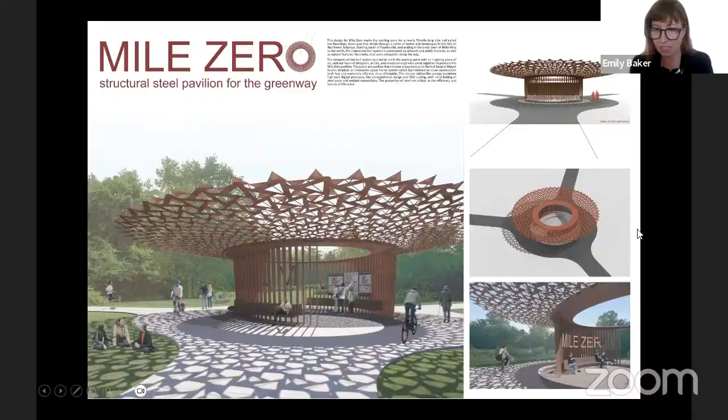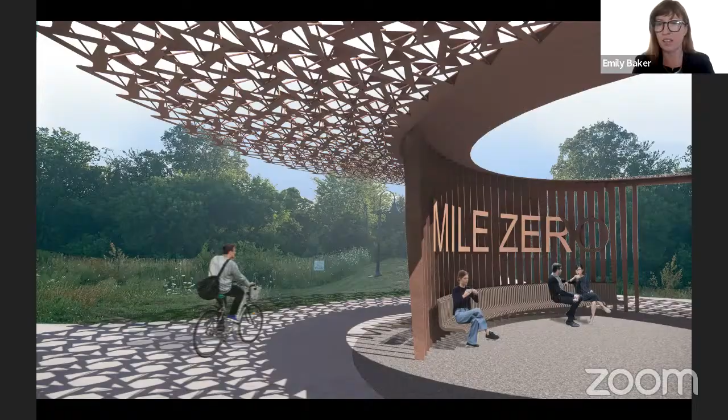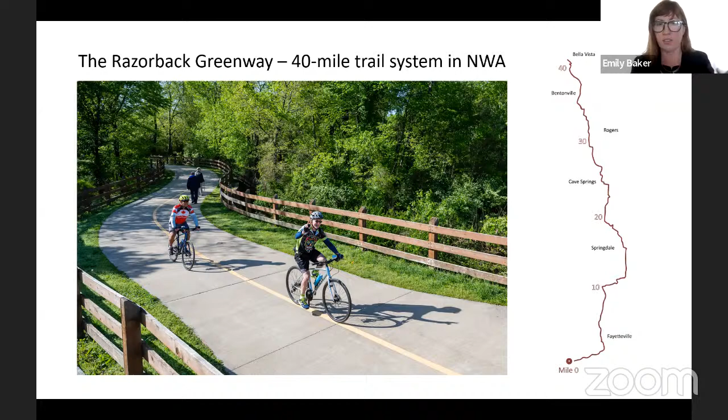The project is a kind of space frame canopy that is supposed to be a public amenity and marker for the Razorback Greenway, which is a 40+ mile multi-use trail system that has a lot of spurs. It's well loved and really well used and a wonderful resource for our area.

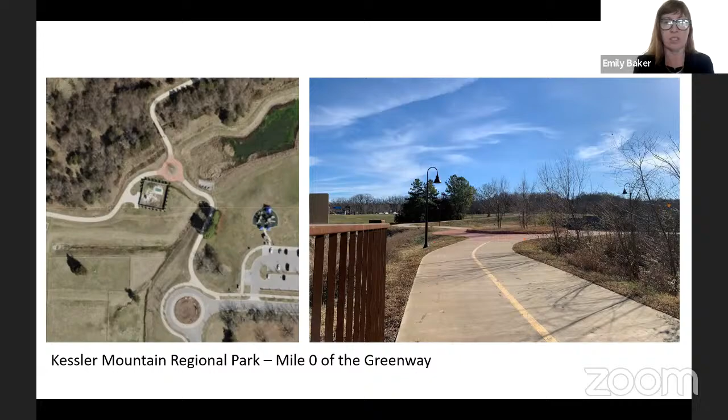The beginning of that trail, the 0 mile of that trail, is at this park, this recreational area called Kessler Mountain that includes a lot of mountain bike trails. It has this little nondescript roundabout that you see in the picture to the right that is the beginning, the Mile Zero of this long trail experience. The only thing marking it right now is this kind of small bollard that lets people know that they're starting at the 0 mile.

So we wanted to, at the request of some regional and city entities that were interested in celebrating this moment of the beginning of the trail system, propose this piece, which is kind of a public art meets pavilion piece that includes weathering steel as the main material and a canopy that's made out of a spin valence system.

I will describe it momentarily. That allows for this play of light and shadow and pattern to happen on the ground below it. So you're kind of moving in this circular pattern around this central point. It provides a place for people to meet up, for people to get information, maps, sit, meet each other, and maybe even take photos after a 40-mile ride.

So spin valence is a system that I developed when I was in grad school that is a Kirigami-based space frame system. Kirigami, like origami, except including cutting, so cutting and folding of sheet materials.

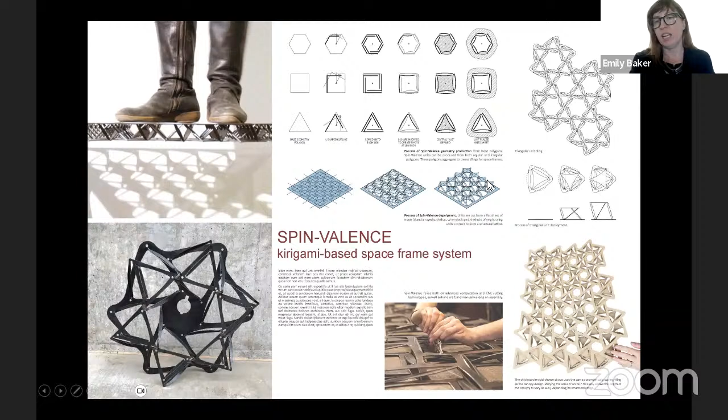The system works by creating a pattern of units that is cut into the surface of a sheet material, or sheet steel. It then folds—each unit folds up and out of the sheet and reconnects to its neighboring units to create structural depth. In this photo, there's a 12 gauge sheet of steel about an eighth of an inch thick, and it effectively gets turned into something that's 2 inches thick with quite rigid structural spanning capability.

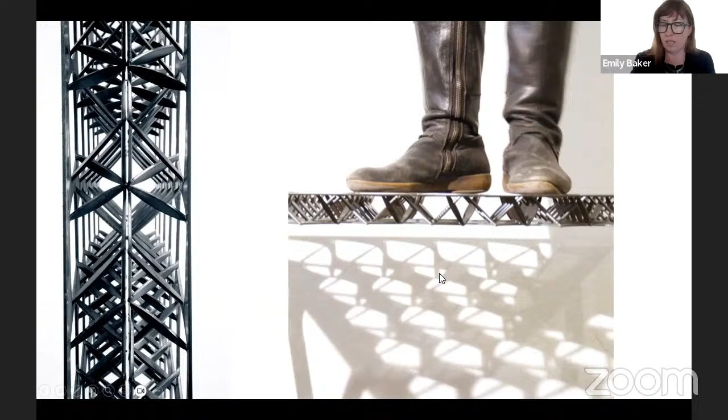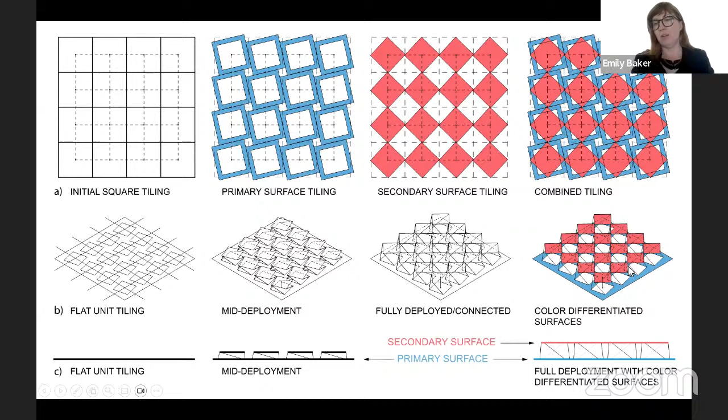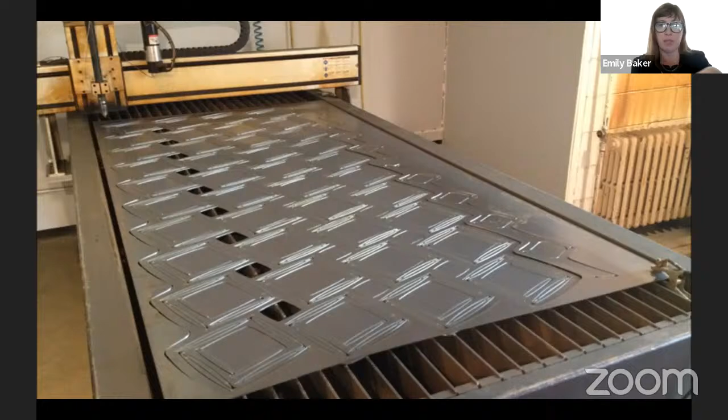You can also see below the way that it transforms light as it moves through. So from one sheet of material, you end up with two layers interconnected with triangulating legs—very similar to a traditional space frame, but the way it works can be a lot more rapid. Here's a plasma cutter with a sheet that's been cut, and that would end up being unfolded into pieces like these.

I've made some larger scale prototypes like this, and been able to observe the way that they deal with light and shadow as it moves throughout the day.

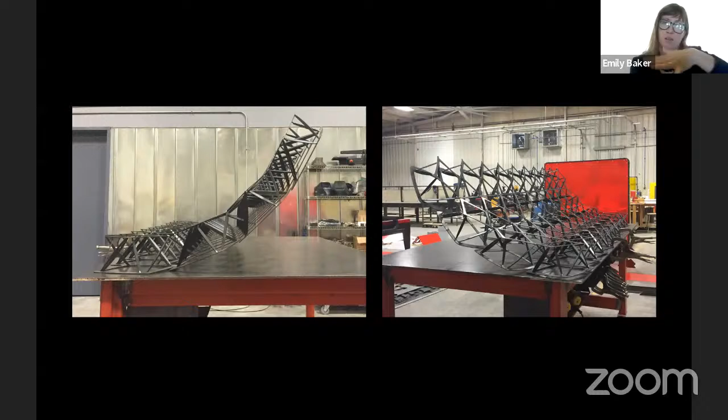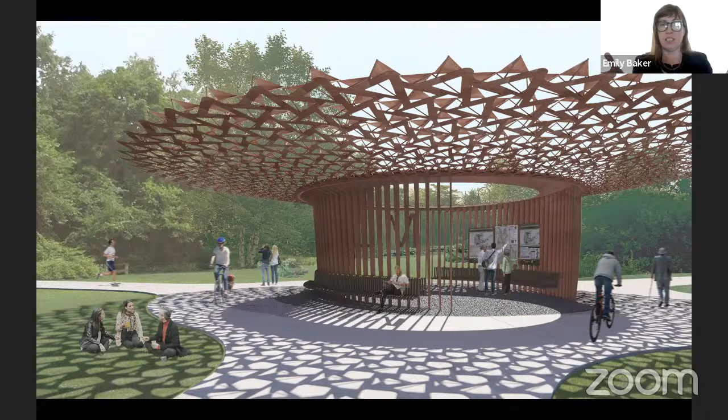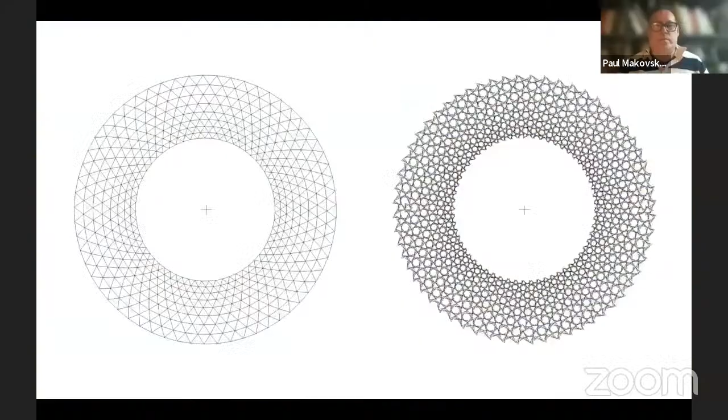I've also done some experimentation with getting the system to curve. But this proposal would be by far the largest and biggest public application of spin valence, with a slight cone shape to it, so it moves away from the flat application a little bit. It's a horizontal application, whereas most things I've tested have been generally vertical, though it has that capacity to span. It also scales from smaller units in the center to larger units on the outside.

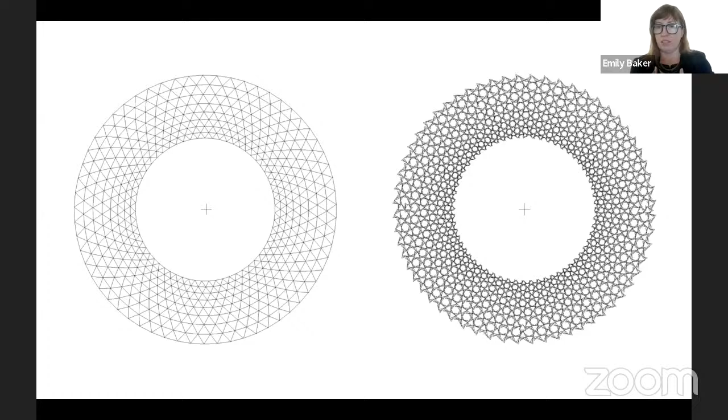On the left, you see the base tiling pattern that we started from, and on the right, you see the way that spin valence system is deployed—that's an aerial view, and this is a representation of it from the air. Because of the scale shift of smaller triangular units on the inner ring and larger ones on the outside, we get a shift in depth as it comes out away from the center.

The ring of space frame comes in and bears on this built-up beam that becomes like a compression ring. That ring bears on these plate-like columns that ring around the central space, which also have an interesting visual effect—sometimes transparent, sometimes a bit opaque.

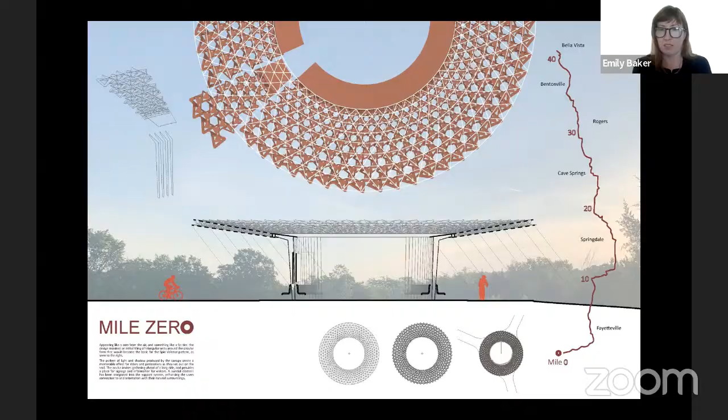Through talking with Tony Diebold, I was able to visit their shop in St. Louis, and we decided to divide up the canopy into 20 slices like this. The end of each slice is just around 8 feet, so it would fit on a large scale plasma cutter and be able to cut out of a single sheet, then be deployed into its structural form, shipped to the site like this, and assembled on site.

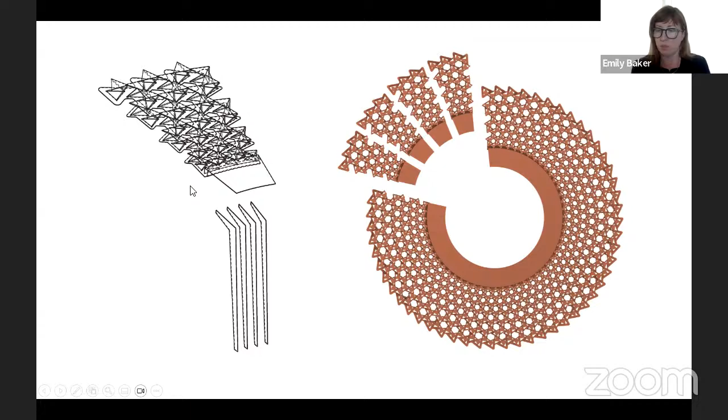Great, thank you, Emily. Now we will show the preliminary structural evaluation of the system, going from a study of individual units to how the whole system is intended to behave.

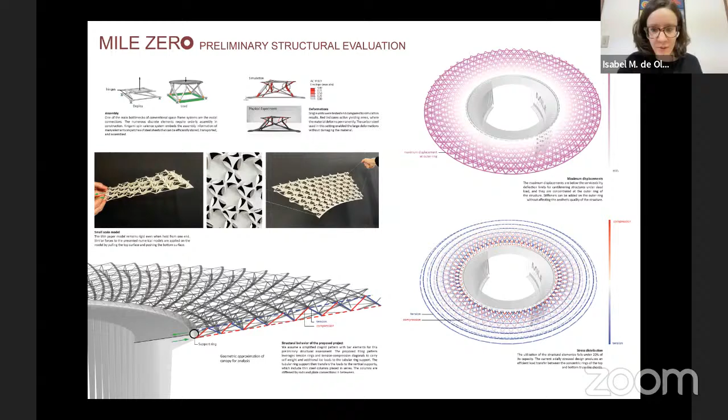First, to connect to the fabrication aspect we were just mentioning, you can see here at the top left the fabrication of a section of the canopy with a paper model. When we first test holding it only from one end, we can see it already shows higher stiffness compared to a flat sheet—here is also a model of this and how a flat sheet would be. Then you can see on the bottom left, three of these sections connected, as we were mentioning, connecting up these sections to make the whole surface.

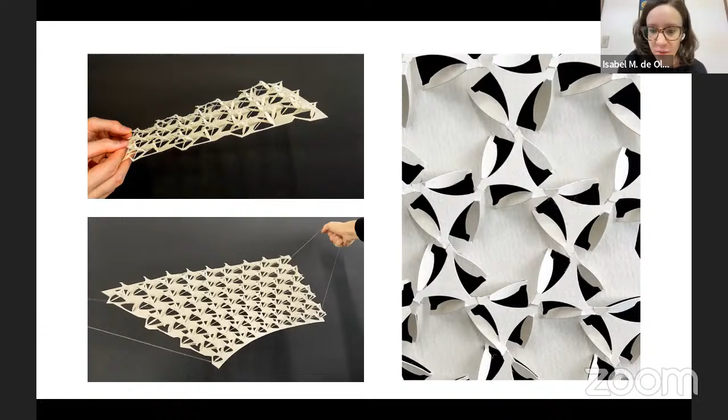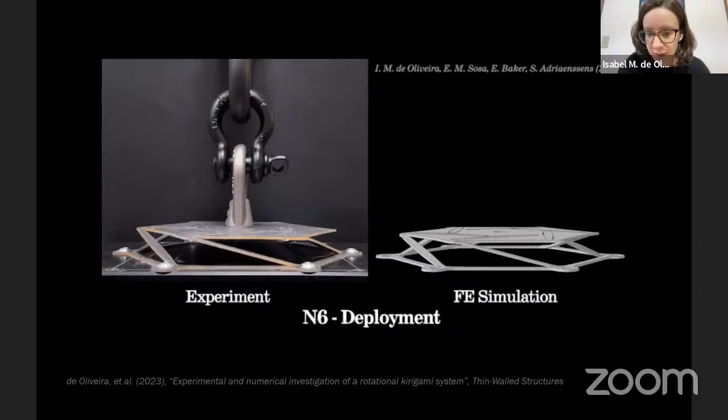But let's take a step back and zoom into the behavior of the individual units as shown on the right. In a recent scientific publication, we show that we can reliably fabricate the system using steel, and that the forces needed to deploy the system remain very low, around 30 to 80 pounds—something we can still do with our own hands.

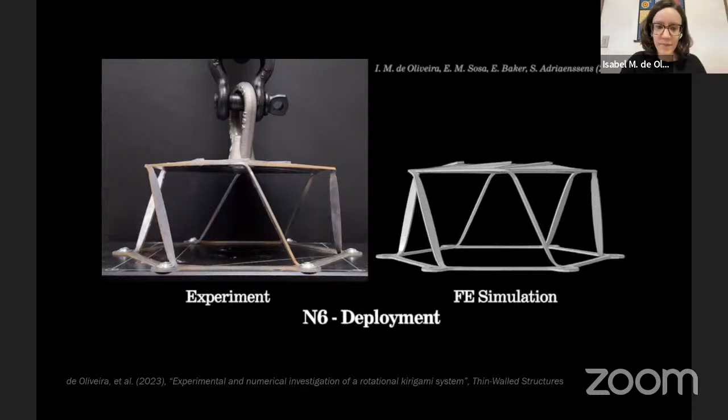Also in the publication, we tested the system under compression and found it can take up to 1,000 pounds, or about 1,400 times its own weight, and that is only for a unit about this size, which I'm showing you here. I'm sure we can develop the system further and get even better results than that.

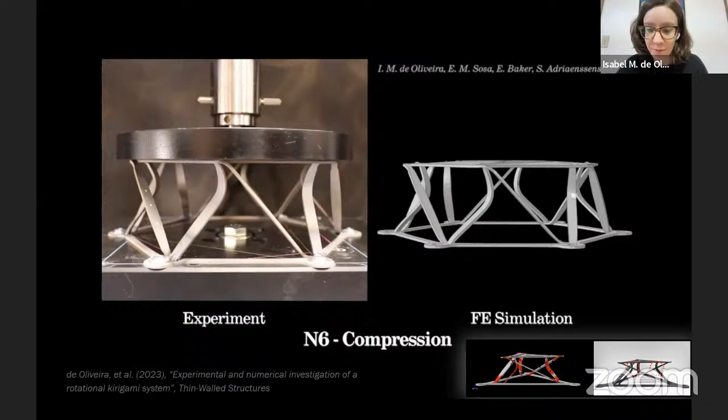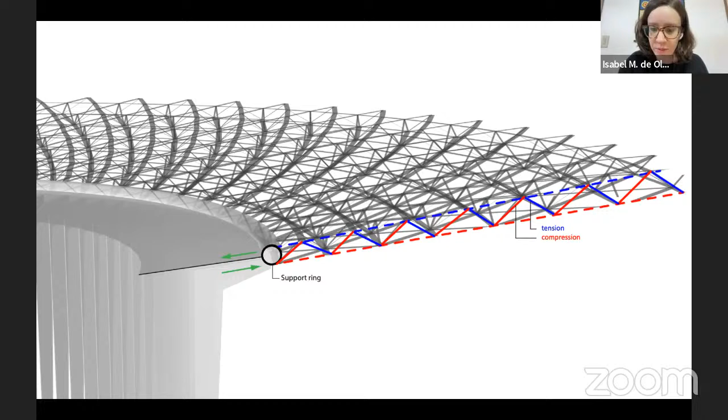So here we show the section zooming out, looking at the section of the canopy. We see that the system can behave almost like the space frame we already know, with mostly axial force flow. And the system can then transfer the forces down to the support ring, which in turn transfers loads to the series of columns that we have on the design.

Zooming out even more, we see the system is not only distributing forces down to the support structure through truss action, but when it is fully connected to the final form, it also self-stabilizes with the tension rings that you can see in blue.

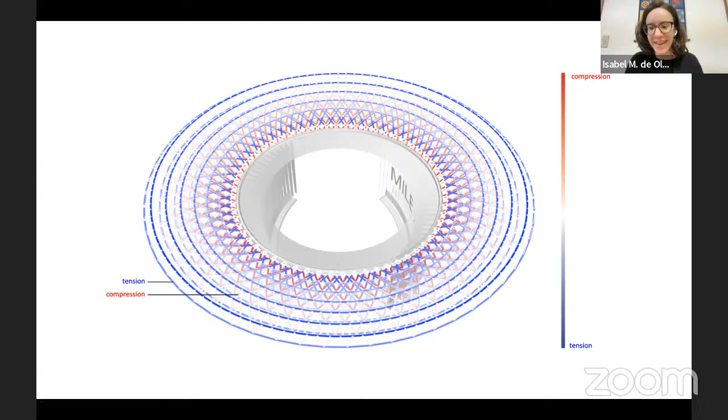Of course, this is only a preliminary study, and if this concept is successful, we would love to dive deeper and have a more detailed perspective of the structural solution. But for now, we leave you with this concept in mind, and thank you.

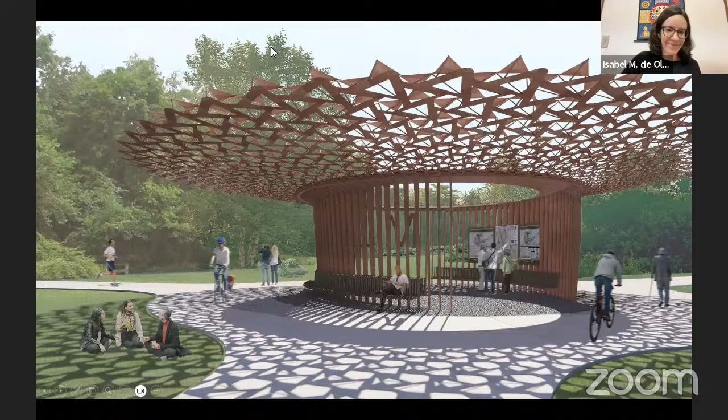How does the sunshade connect to the compression ring in the center? Is it just a bolted connection or a welded connection, or? Well, when we discussed it with Tony, we talked about site welding, but I think those are things that we would probably have to iterate with our fabricator and make sure they work well. Yeah. Okay, that was my question.

I have a question. How wide is the inner ring? The outer diameter is 60 feet. The inner ring, I don't have the exact dimension off the top of my head. It's 22 or something like that.

Okay. I guess, having this pavilion which is going to provide shading, and hopefully if it's raining, how much of the pavilion is, let's say, practical? It's not meant for really rain cover the way it's designed right now. It doesn't have a surface on top of it. Right. Yeah, it's meant to be kind of an outdoor sculptural piece.

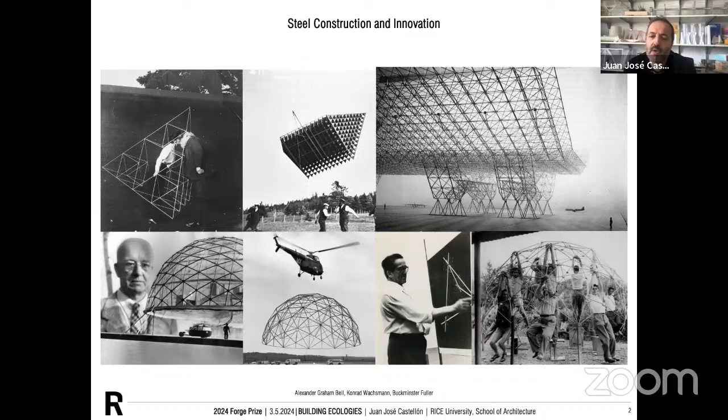Traditionally or historically, steel construction has always been at the forefront of building innovation. If we take references like Buckminster Fuller, Konrad Wachsmann, or Alexander Graham Bell, they all imagined and materialized beautiful and innovative structures. But what made these projects extremely impactful in their context was that they were also proposing ecological and sustainable building models for our planet.

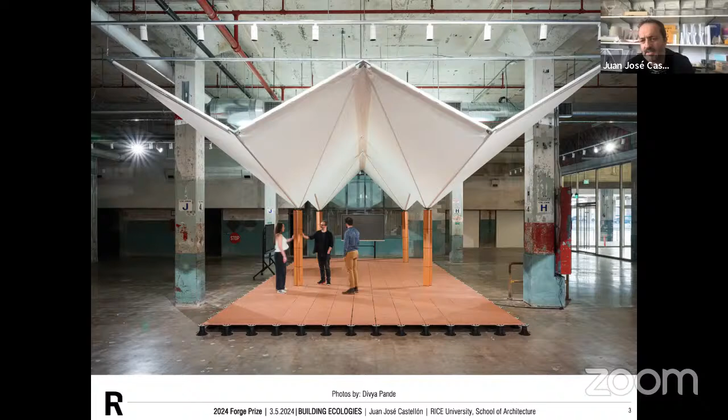So inspired by this tradition, Building Ecologies is conceived as a modular and collective building infrastructure that provides shading and shelter while collecting, cleaning, and harvesting rainwater for irrigation purposes, as well as heating and cooling strategies for urban rooftops and public spaces. Questions of lightness, prefabrication, modularity, transport, assembly and reuse converge in this proposed kit of parts.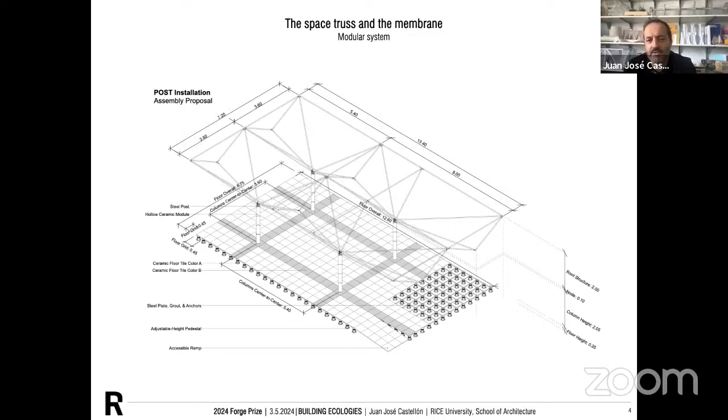And there is an additional layer that is more cultural. It bridges my own culture—I'm from Spain, from Barcelona. We have a strong tradition in metal, especially textiles, metal, and also ceramics. This project was developed also in collaboration with manufacturing companies in Spain and in Houston, Texas.

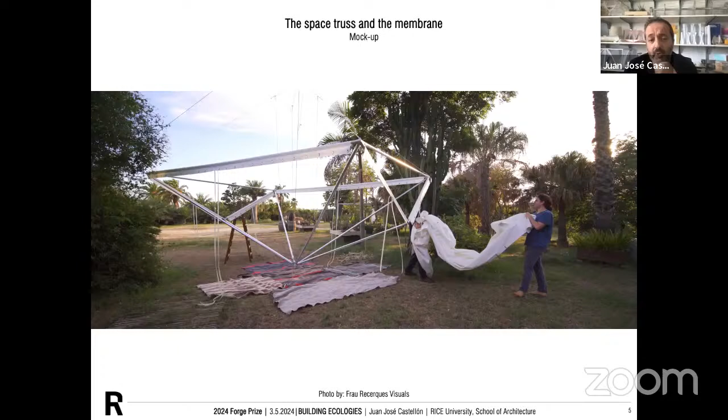So the canopy, in this kit of parts—the canopy, which is the most complex structure—was conceived as a space truss, and it was developed. Here you can see one of the mock-ups that was developed in Barcelona, in my hometown. And then the faceted waterproof membrane that collects and cleans the water was also developed there.

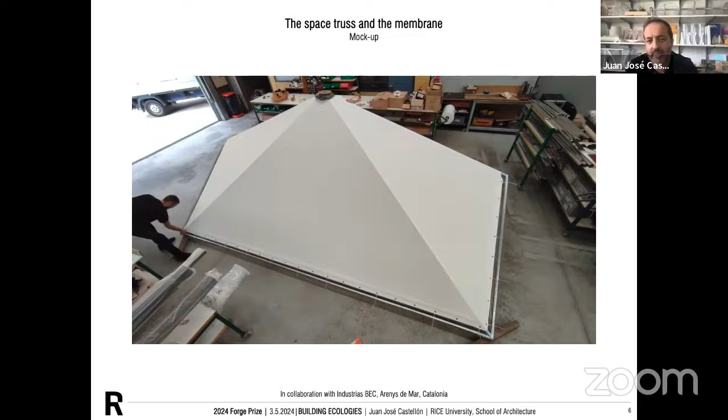This also connects with an ongoing technology, an ongoing project and research developed by our Civil and Environmental Engineering department at Rice and led by Dr. Qilin Li, that basically cleans all the impurities of rainwater—those raindrops that come from the atmosphere—allowing the water, when streaming through the expansive membrane, to be collected with already a level of treatment.

And then once collected, the rainwater is channeled through a component-based ceramic column that was also developed in collaboration with ceramic manufacturers in Barcelona, and connects also with the tradition of vernacular architecture that, in former times, these pipes were not PVC or plastic, but actually ceramic, and we wanted to bring back this kind of quality in the building components. So these elements, these ceramic pieces, work both as a structural element and as a water pipe.

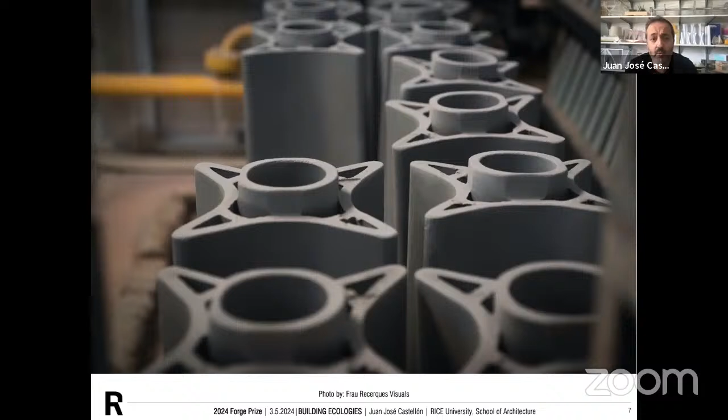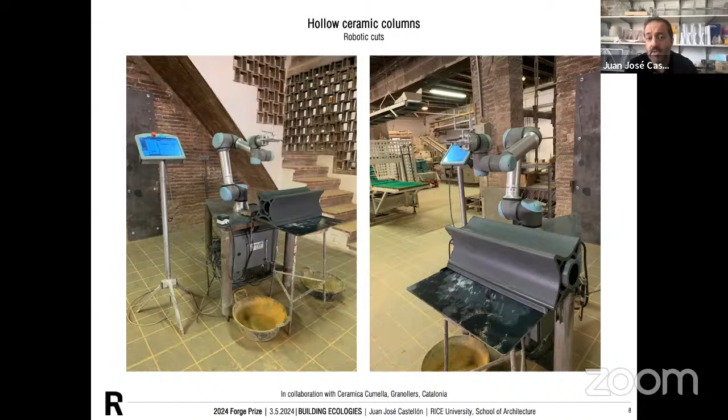And these ceramic pipes were developed again with traditional techniques, but also in combination with more digital technologies like robotic fabrication to generate these kinds of connections. So the resulting prototype was built and exhibited as an installation at Post Houston, and it was open to the public from October 2022 to April 2023.

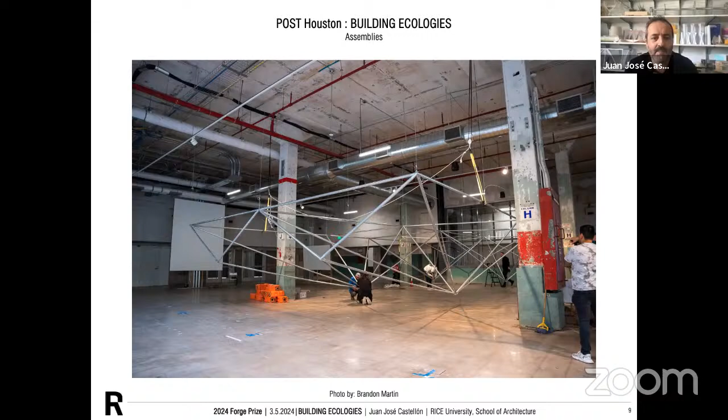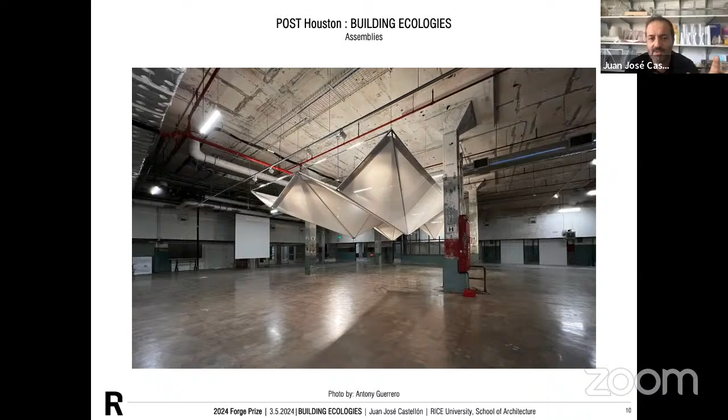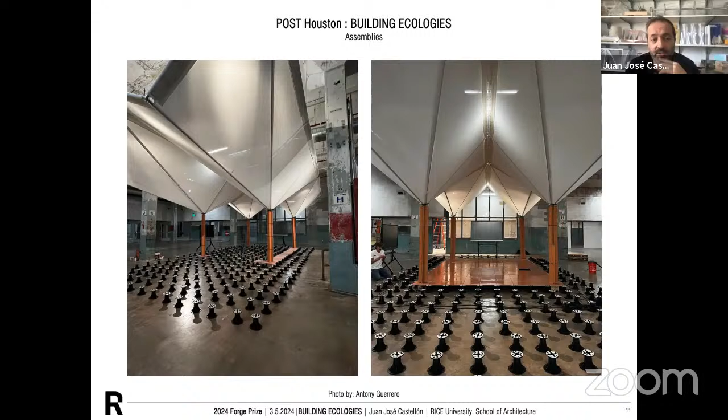So here you can see some images of the installation, which was also a very interesting experience because I brought some colleagues from Barcelona and some crew from Texas, and they were working together in the construction of the prototype, which was a really exciting moment. The resulting prototype came together as a nice combination of a pre-existing condition and a new nature emerging out of this material and structural logic.

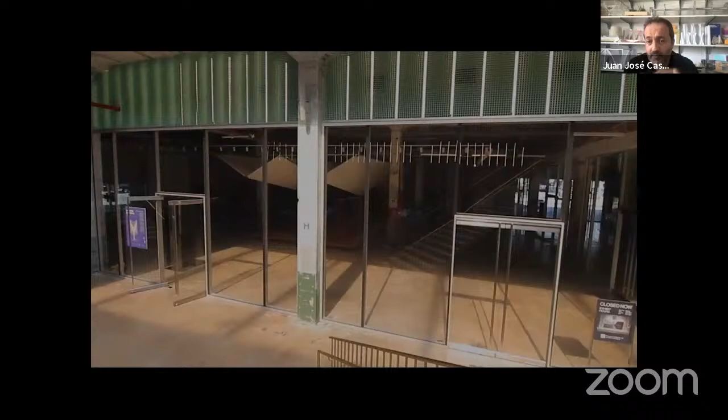Since the project, I'm now showing a small video that shows a bit of the final result, and you'll hear a small sound in the background. Since the prototype was built indoors as an exterior installation, I was collaborating with the composer and professor at the Shepherd School of Music at Rice, Kurt Stallman, to generate a soundscape that simulates and evokes the sound of raindrops and water streaming.

But of course, what we would like is to have this in an exterior experience. I think there is a part that is experiential, so actually bringing another layer of sophistication in the structure that is not only functional but aesthetically pleasant. And also in terms of perception, something I really enjoyed was how people were interacting with the piece, basically touching the materials and experiencing this kind of atmosphere.

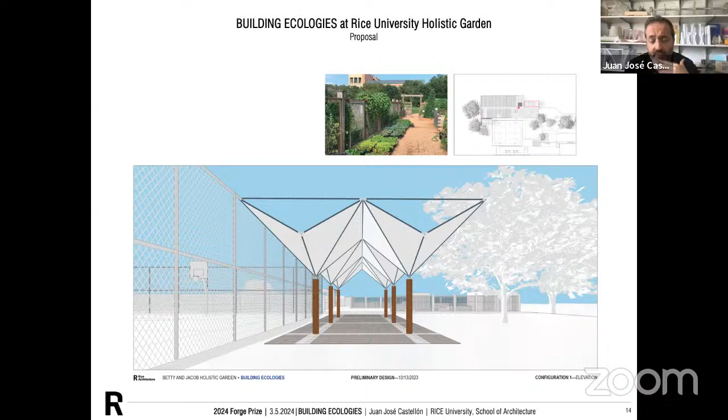So boosted by this generous award, we are now adapting the concept to an outdoor full implementation, which was the whole purpose of the project. The proposed site is at Rice University, the Holistic Garden, which is an urban farming and teaching outdoor space on campus that now demands more opportunities to collect and clean water for irrigation purposes, but also spaces for outdoor teaching and collective events.

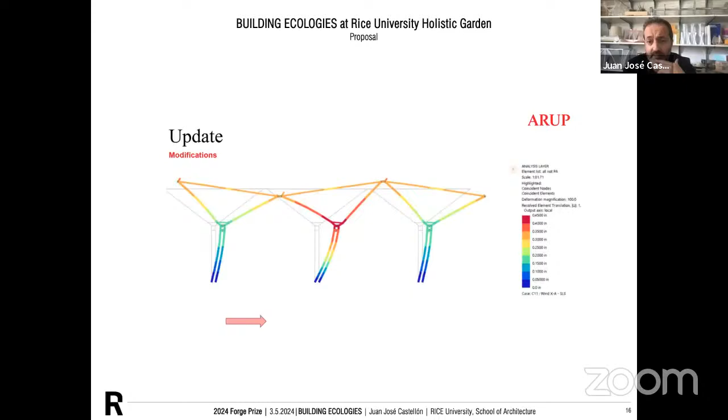So together with Thompson Metal Fab, with Thomas, but also with Arup Engineering, we have analyzed, simplified, and refined this modular system to respond to, for example, wind loads and other functional requirements. We have run a set of several simulations, double checking the feasibility of the project.

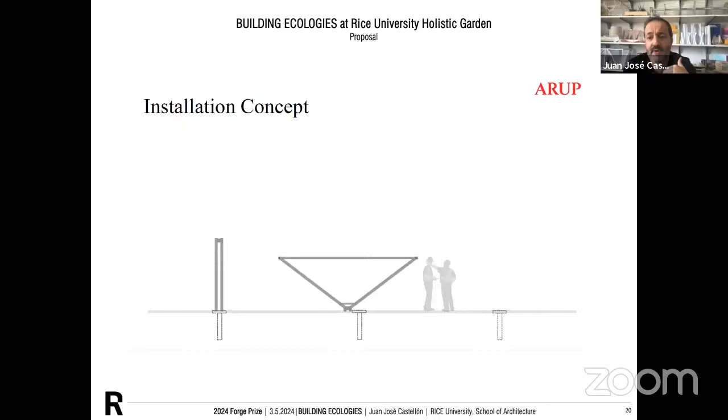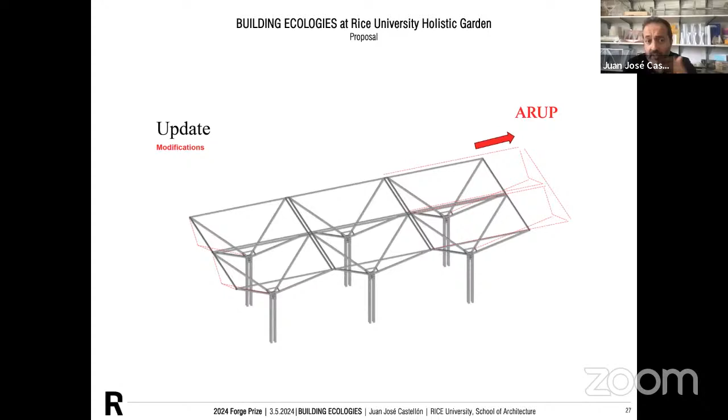And also the goal would be to achieve a system that is economic and easy to manufacture, transport, and assemble, and also adapt to different contexts and conditions. So there's a part of the project that involves the possibility to adapt this modular system into more expressive forms. And we are using technology for precise design and manufacturing of all the building components.

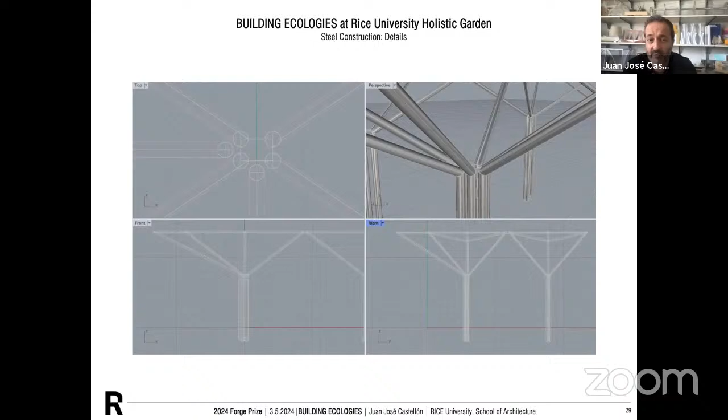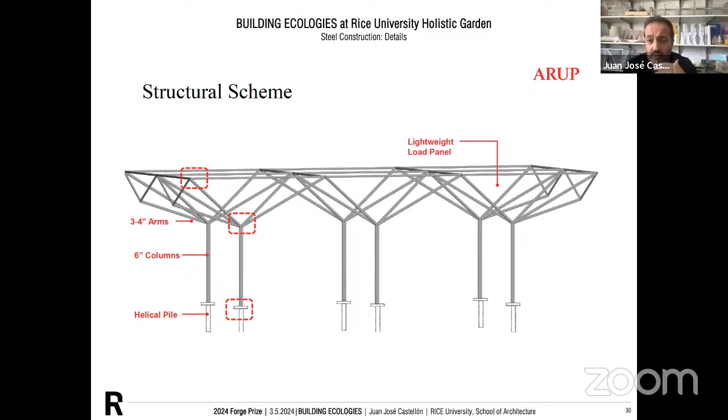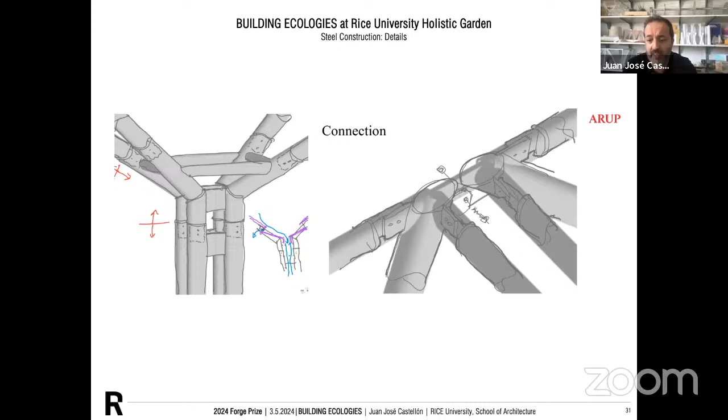Together with Thomas and John, we have been going through the project, trying to simplify it but also make it more feasible in terms of the connections, keeping the elegance of the proposal but making it economic and easy to assemble. So, for example, with Thomas and John, we were finding the right way to generate these connections in a plate-to-plate way, easy to manufacture and assemble.

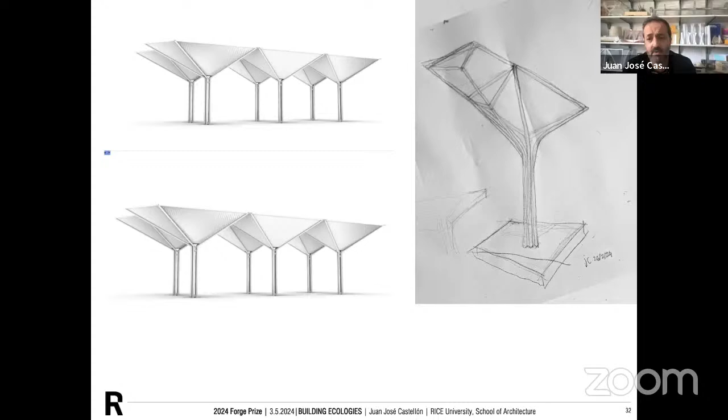But we want the steel structure to be the main protagonist while preserving the aesthetic qualities and philosophy of the original concept. So the result is an architecture that dialogues with the natural context and with our community, and explores contemporary and holistic notions of building and sustainable urban infrastructures.

So together with my brilliant team and excellent collaborators, we look forward to materializing the project that strives to achieve a balance between economy and beauty, ecology and innovation.

Thank you. And here a list of the team, with Elliot, my research assistant, who helped me with the images and the development of the project, with John Hand, Arup Houston, and Stephen Donnelly, and also, of course, Thomas and Eric from Thompson Metal Fab who collaborated on this project, which I really enjoyed.

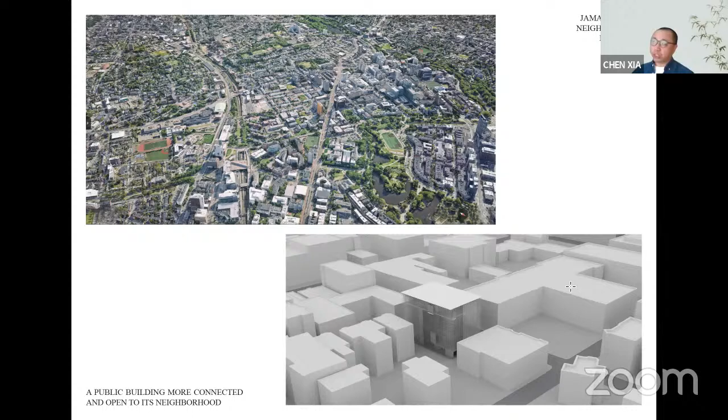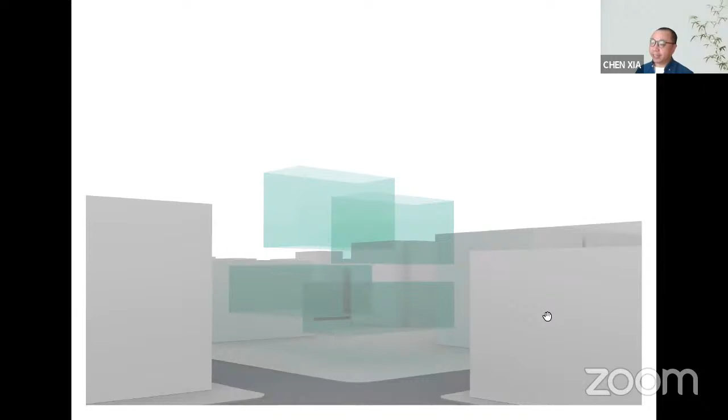This project is a public building proposal located in Jamaica Plain in Boston, Massachusetts. The client is a local artist organization looking for a public building design for local art activities. They want a building that feels more connected and open to its neighborhood. This is a concept physical model, and my basic design idea is to elevate some glass boxes in the air by a supporting structure with a sense of lightness and translucency. This is a concept image showing my design idea of the relationship between interior spaces and exterior skin.

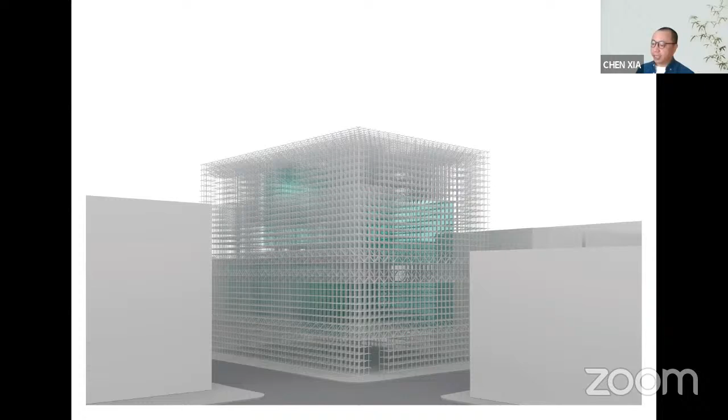To realize this idea, I think steel is the best choice of construction material. A regular cubic steel grid system can not only be the structure holding the spaces in the air, but also create the sense of lightness and translucency itself at building and urban scale. During the last couple of weeks, with advice and help from my supervisor John, I have revised the steel grid system. The whole structure consists of multiple modular steel cubes, with each cube measuring 2 feet in all 3 directions.

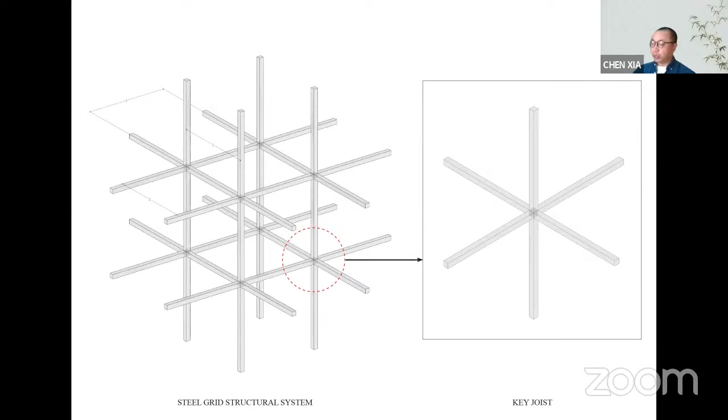The key structure of this system is the crossing joist, where steel tubes in all 3 directions meet. This is the key modular steel joist I created with John's advice and help. In the center there's a steel core, with 4 identical horizontal steel tubes and 2 identical vertical steel tubes. Now I will show the assembling process of this key steel joist.

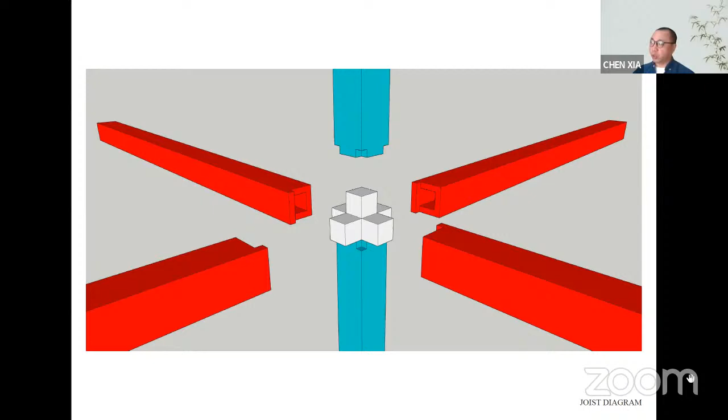Based on the concept and the steel structure design mentioned above, this is the final design of the Community Art Center, a translucent building that opens to its neighborhood.

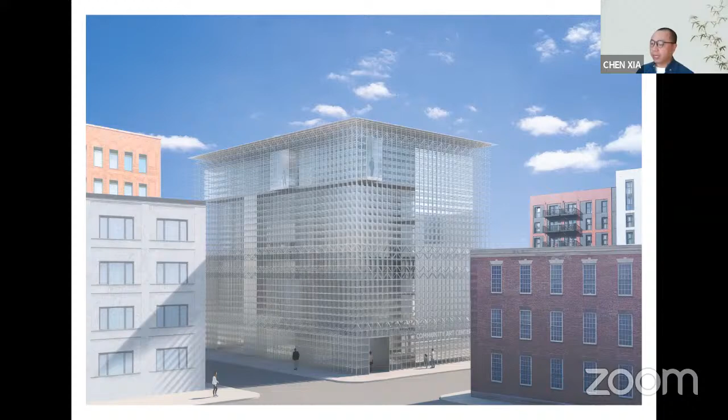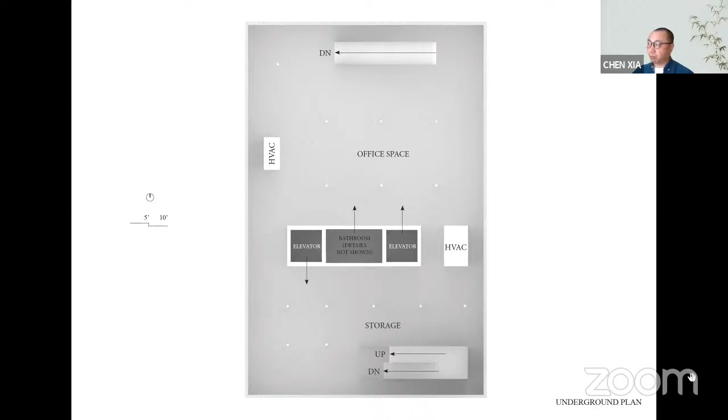This is the underground floor plan, with office and storage spaces on this floor. The ground floor is for public open space, with two staircases by the sides and an elevator core in the center.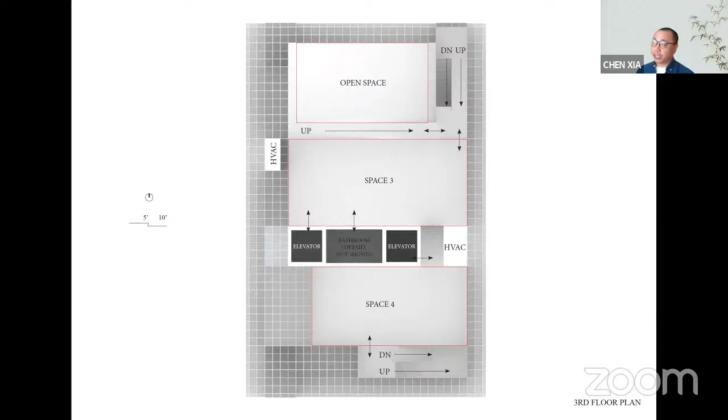On the second floor, there are two glass boxes as interior spaces. Similarly, on the third floor, two glass boxes serve as interior spaces along with an open space. On the top floor, the top terrace along the west side is an enclosed space connected with the space below.

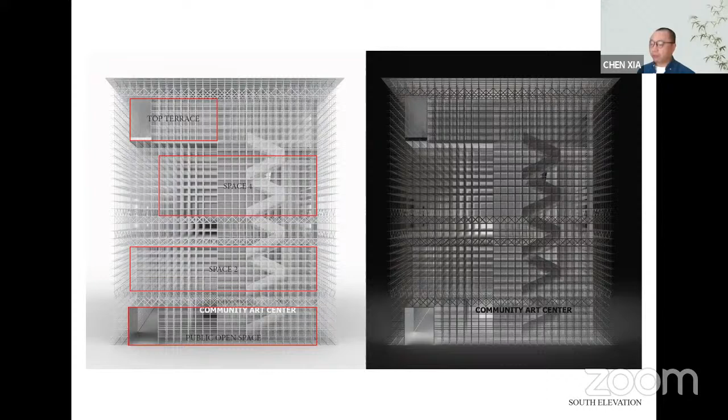This is the south elevation in day and night views. From the south facade, people outside can sense the interior space.

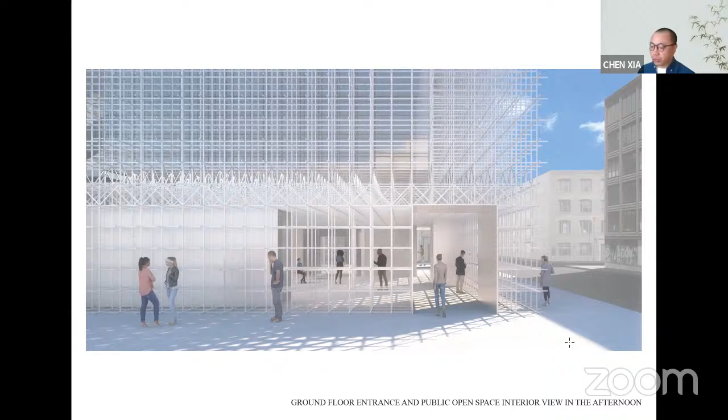For the rest of the space on the ground floor, the steel grid system doesn't enclose the space, it defines the space, so people can walk through, stop by, and get together on the ground floor. This space is part of the building and also part of the public open space of the neighborhood.

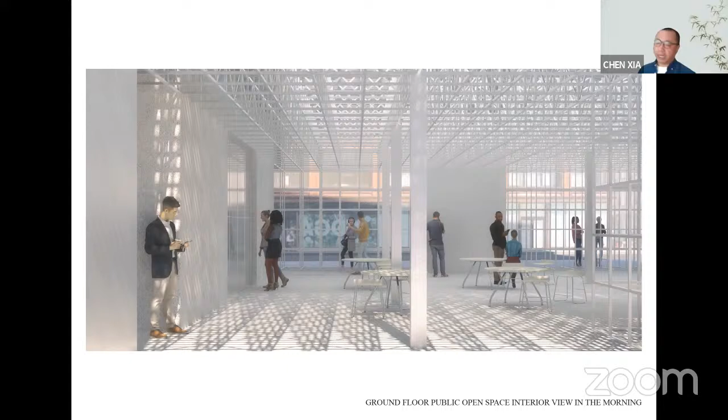Since the center core blocks the sunlight, space 1 and space 3 are covered with shade for most of the daytime.

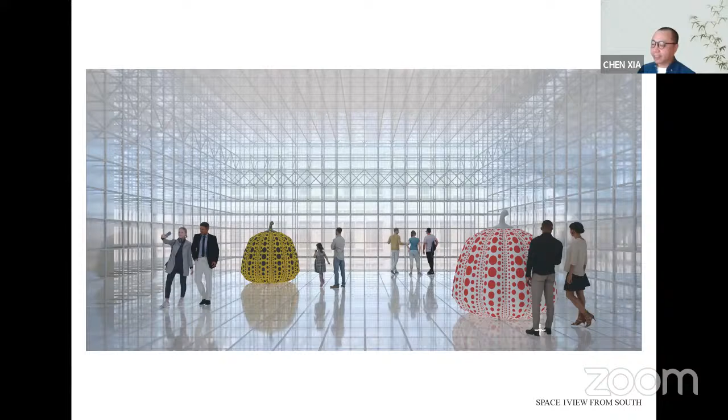This is a perspective view in space 1. People inside can sense the surroundings outside. Another view in the same space from the opposite side. For sure, there will be direct sunlight at some point in the day.

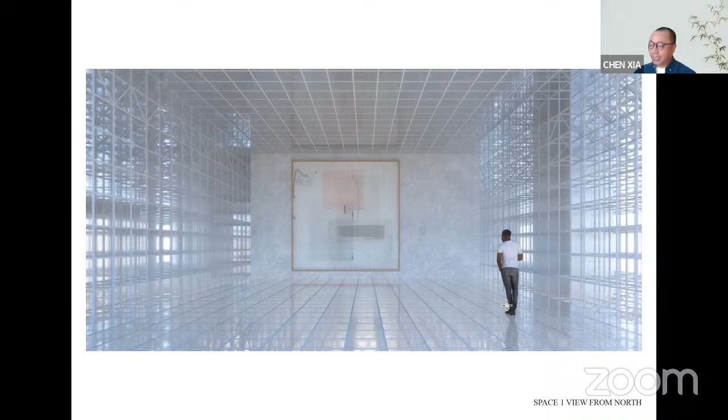Now I will show the sunlight and shadow variation in the space from morning to afternoon: 6:30 a.m., 8:50 a.m., noontime, 3:10 p.m., and 5 p.m.

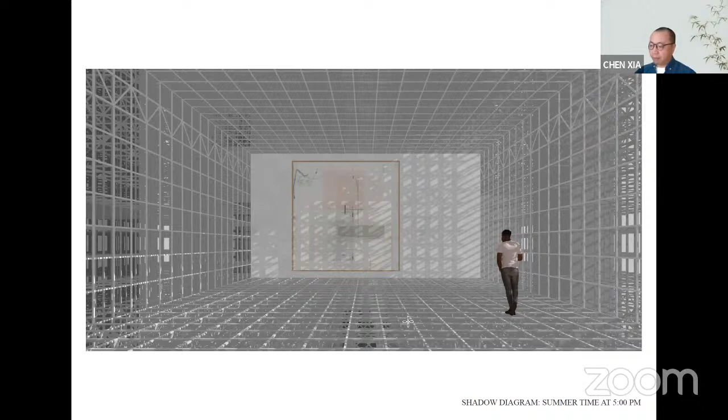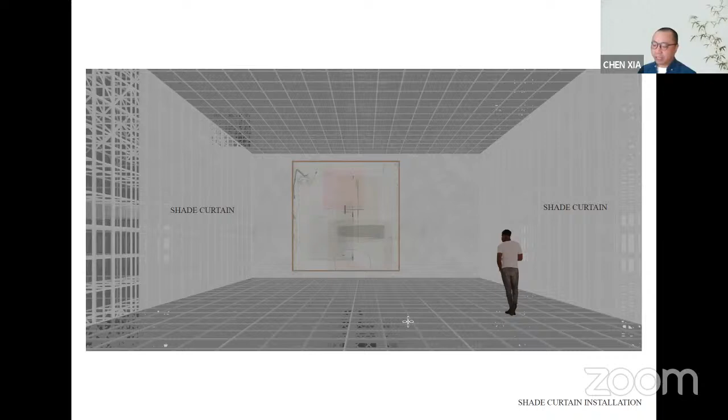The direct sunlight in space 1 and 3 only happens in early morning and late afternoon. If the art material is very sensitive to sunlight, or if there is some need for an all-time shade environment, my solution is to install shade curtains to block the direct sunlight.

Space 2 and 4 always get sunlight all day long. Sometimes maybe it's a good thing, because the shadows of the steel grid system may create a more artistic environment in the space.

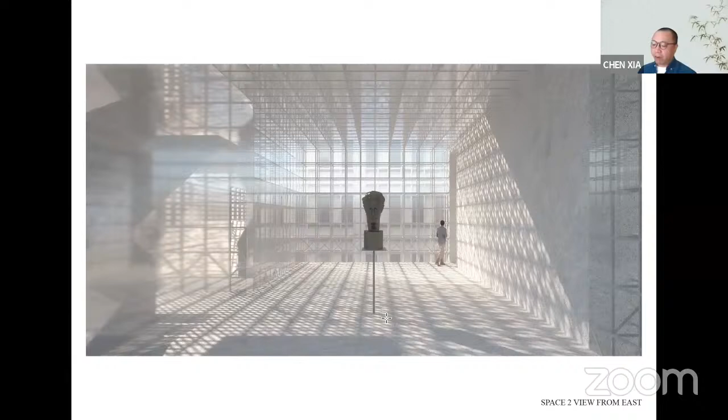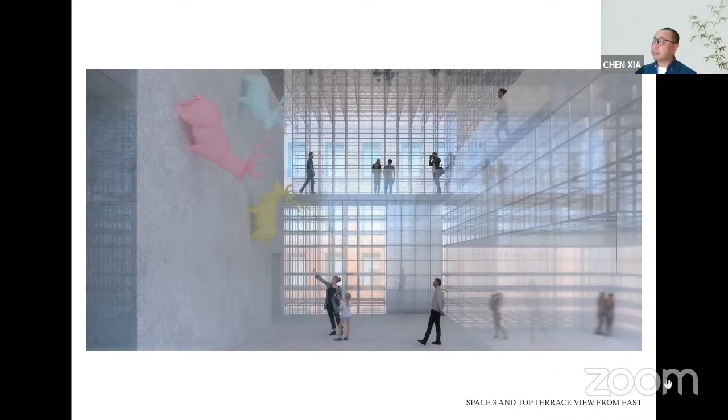Here's a long section cut from here. If we zoom in on this moment, we have this view in space 3. People in the open space and on the terrace can walk around for the neighborhood views, and people inside the glass box can sense the surroundings outside.

Here's the short section cut through from here. If we zoom in on this moment, we have a view in the same space. People on the terrace can see what's happening in the space below.

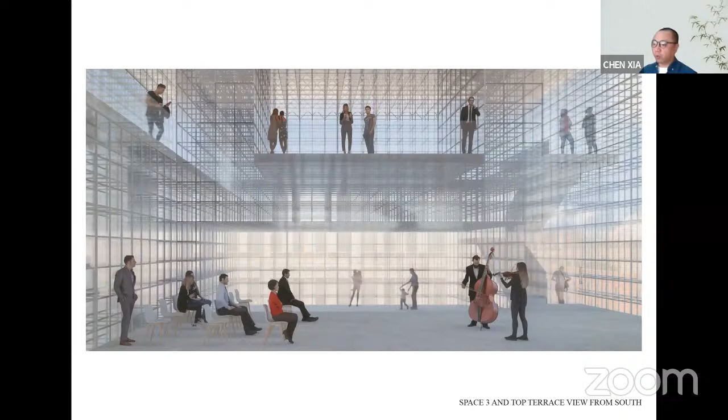As an important part of the building structure, the steel grid system combines trusses, posts, beams, and the vertical and horizontal structure cores together for structural stability. For the architecture design, with a sense of lightness and translucency at building scale, the steel grid system connects the interior spaces with its neighborhood.

And that's all, that's my design. Thank you so much.

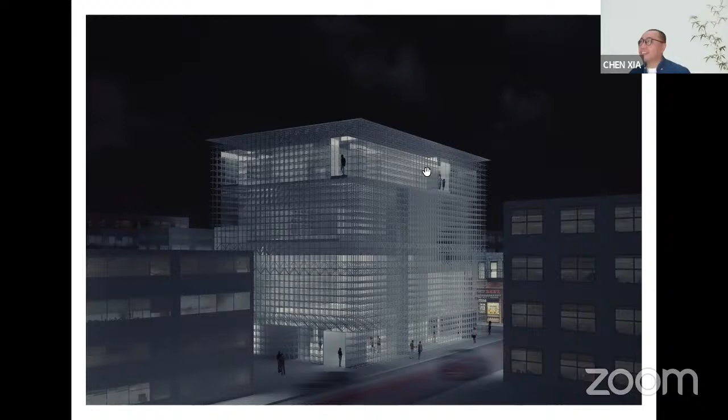It's a very beautiful project, Chen. Thank you. Just wanted to say that from the front, the continuous nature of the way the steel works makes it visually very beautiful.

One simple question: your slide-together connections, are you anticipating that those are bolted as well? Yes, both, I think. Okay.

Yeah, I'll just add, I also appreciate the design of the veil system. It seems to really be conducive to your idea of letting the community in and giving some visibility to the interior, and then also back to the exterior. I think what I would like to see on that night shot is a view of some of the art pieces, because if you could see in, it would just be really fascinating to see all the pops of color coming from that, and really kind of jazz up that sexy night shot. Thank you.